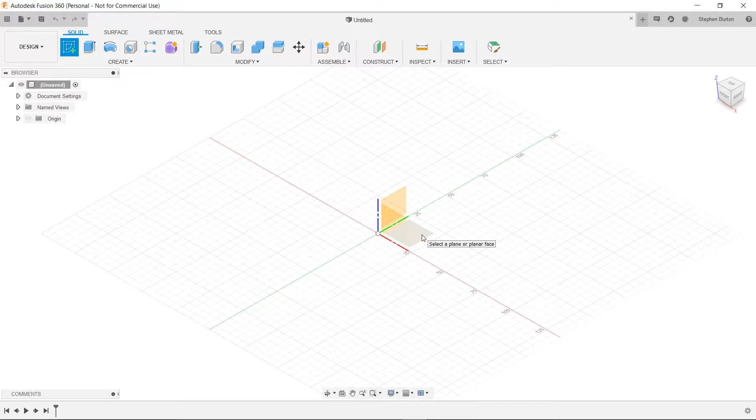So, we're going to start off nice and simple by clicking on Create a Sketch, and we're just going to choose our XY plane here. Now we're going to press R for rectangle, and this is going to give us our 2-point rectangle by default. So if you wanted to change that, you have your selections over here to 3-point and center rectangle. But first, we're just going to use 2-point. So we're going to place our first corner.

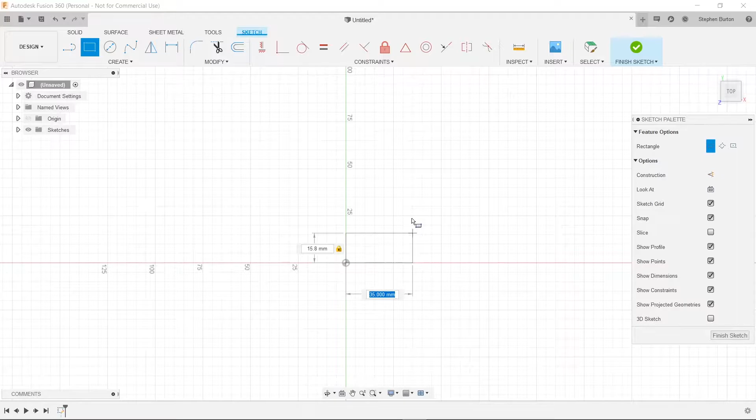And if I didn't mention, I did find the dimensions of a Lego brick online, so I'm actually going to be using those so that we can follow along with that. So, according to this drawing, we have 15.8 millimeters this way. We're going to hit Tab. And then we have 31.9 millimeters that way, and we're going to press Enter.

Now, hearing me say millimeters, if you guys don't have your document set to millimeters by default, then you can go up here to this little drop down arrow, and then we're going to go right over here to change active units. Now, right now I do have millimeters as my default, but if you don't, if you have it in inches or something, then you can select millimeters and then press OK. Well, I'm just going to hit cancel because I didn't change anything.

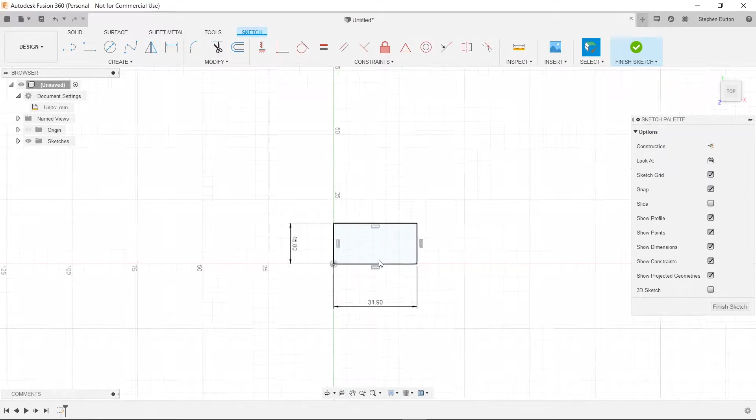So now we need to extrude this. This is like the base, the outline of our Lego. So we are going to extrude it, and according to my dimensions, it needs to be extruded by 9.6 millimeters. So we're going to hit Q, select our face, and then type in 9.6 and press Enter.

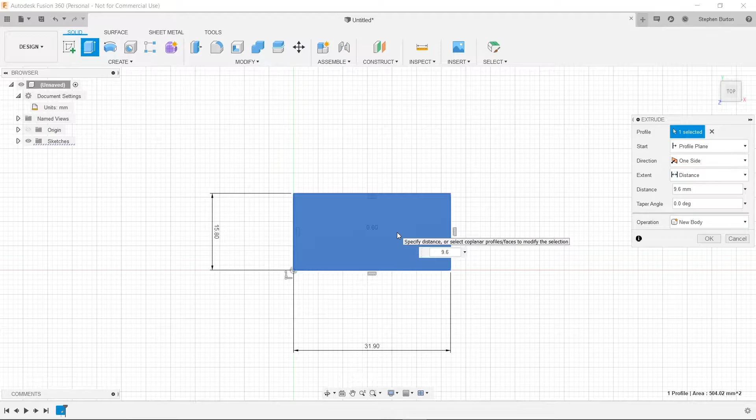So, if we drag down a little bit so that we can see the other side of it, we do now see that there is actual depth to this rectangle. So now it is actually a box, basically. So, we now need to draw in the circles, those little nubs at the top that let the Legos interlock with each other.

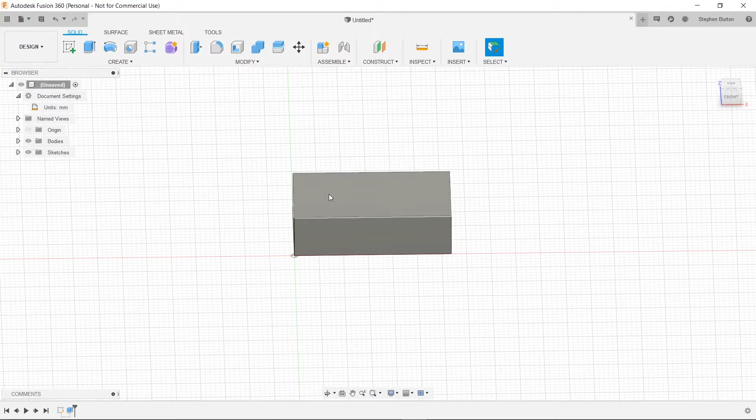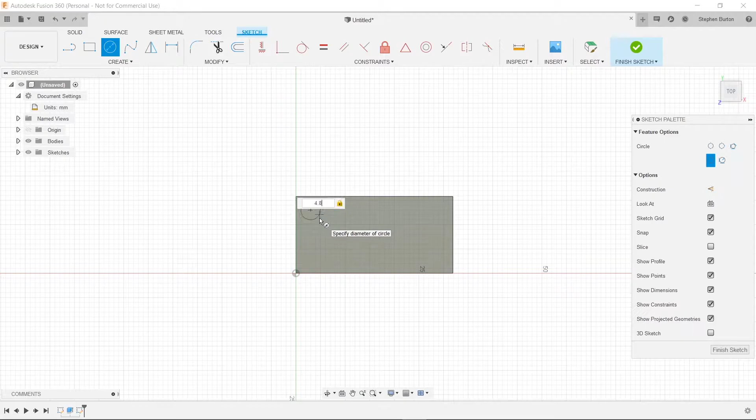So we're going to click on Create a Sketch, and we're going to select that top face here. We're going to go up here to Center Diameter Circle, or we could have pressed C, and we're just going to draw here. It doesn't really matter where at the moment, and the dimension that we need is 4.85 millimeters as our diameter. Now the reason why I said it didn't matter too much is because we're actually going to change that position right now.

So the way we do that is we're going to press D for dimension, and then we're going to select that center right here, and then we're going to select this edge. Now that's going to give us the perpendicular distance from that edge to that center, and we want to make this, once we click, 3.8 millimeters.

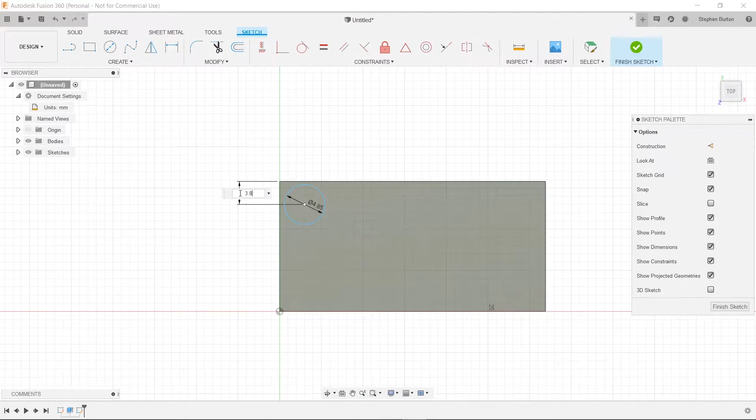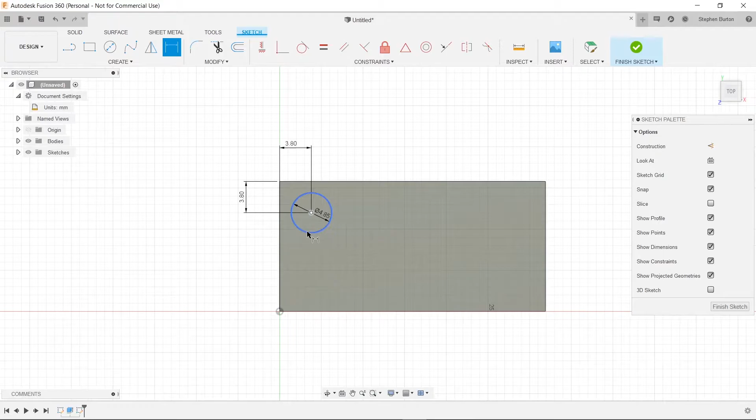And we're going to do the exact same thing again. We're going to click on this center, click on this line, and now we're going to go up here and do the exact same 3.8 millimeters, and we're going to press Enter. Now we want to extrude this before we copy it. So we're going to press Q, and we're just going to click on it. And then the extrusion depth, this is saying that it is 2 millimeters tall. So we're going to type in 2 and press Enter.

Now we could draw every single circle in, however, I think it's easier just to copy it, and there's a nice tool that actually allows us to do that with faces like this. So we're going to go into Create, and then go down to Pattern, and Rectangular Pattern. So first, we need to choose a pattern type of features. It might be faces by default for you, but we're going to select features. Now the reason why we choose this is because we're actually going to select the extrusion.

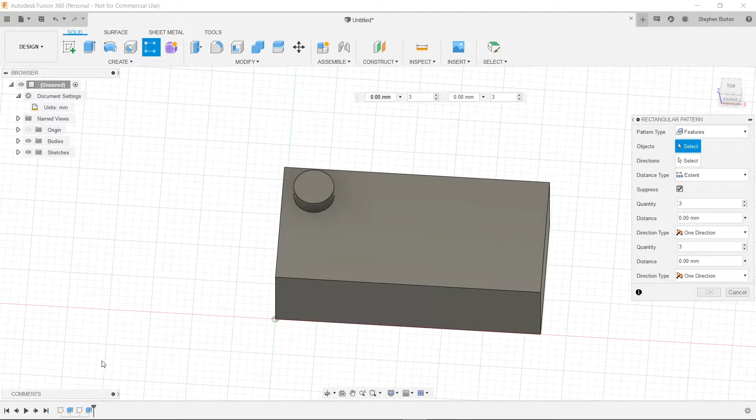And now we have our object selected. We're going to click on Directions, and we're going to choose a path for it. So we can choose either of these sides because they both are on the same path as what we want to draw this out. So we're going to select this as the path, and then we're going to choose 4, because when it says four copies, 4 includes the one that you copied. So if we typed in 1, it wouldn't do anything.

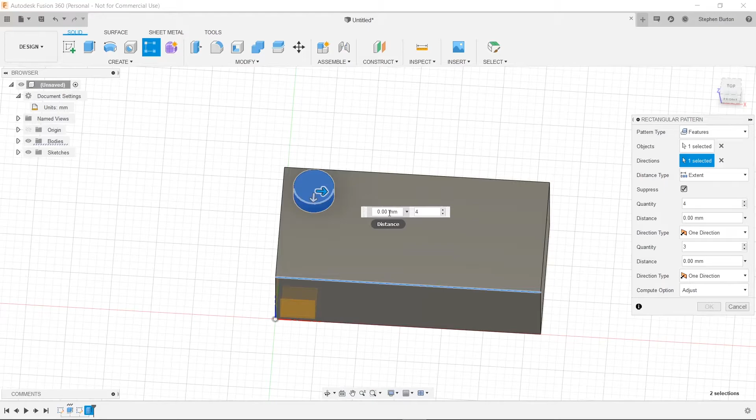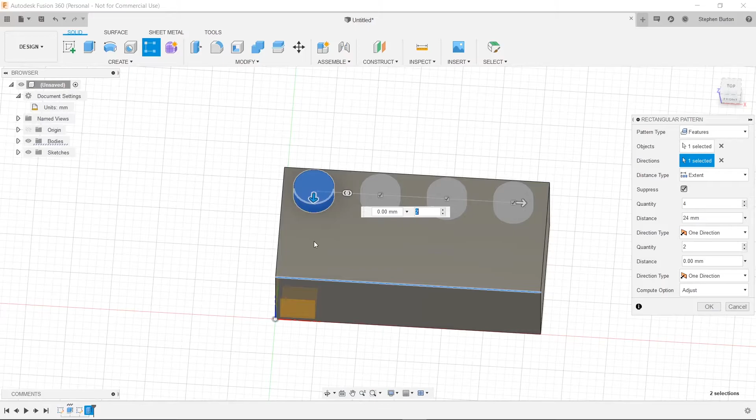So we're going to choose a distance of 24 millimeters, and then we're going to click on this because we're going to also want to copy down here, and we're going to choose a quantity of 2 because now it's going to be copying all 4 of these. So we only want to copy them once down here, and at a distance of 8 millimeters. And then we're going to press enter. Now it's starting to look like a Lego to me.

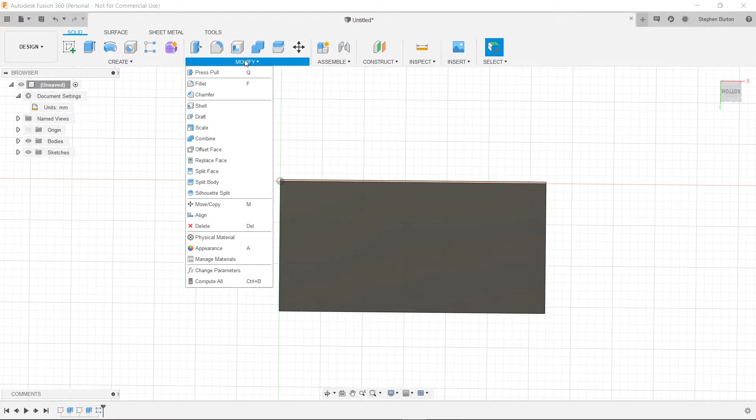So we're going to actually go down all the way to the bottom, and we're going to cut it out. So we're going to go up to here to modify, and then we're going to go to shell. We're going to click on the bottom face, and then it's asking for how much we want to leave. So looking at our dimensions here, our inside thickness is 1.2 millimeters. And then we're going to hit enter.

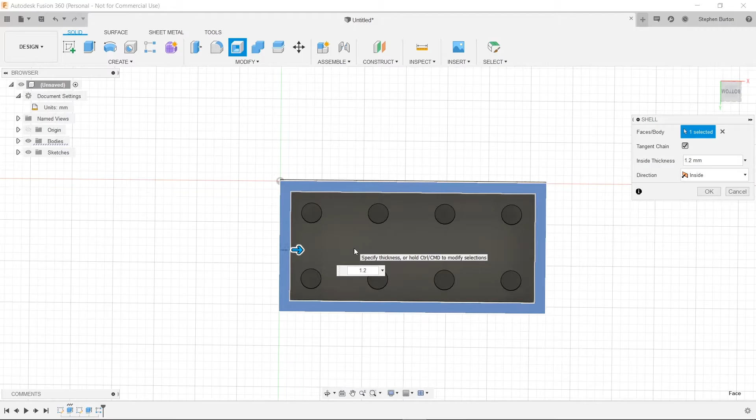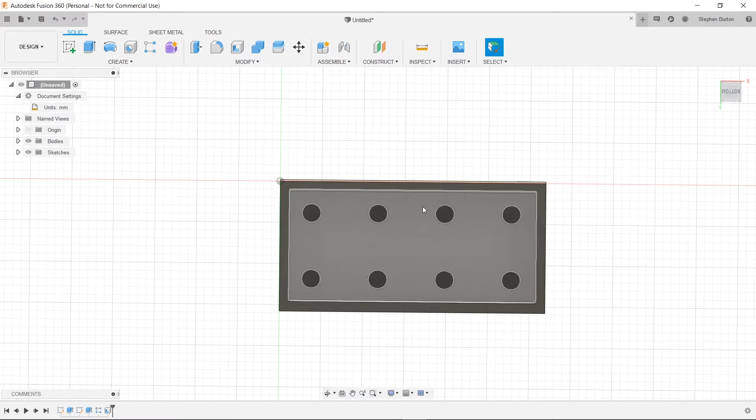Now that we have 1.2 millimeters, we need to create a sketch on this plane here. Because there are 3 circles here, 1, 2, and 3, that are going to be interlocking with the nubs on the top so that you can actually snap these Lego pieces together. So we're going to go up here to create a sketch, and we're going to select this face.

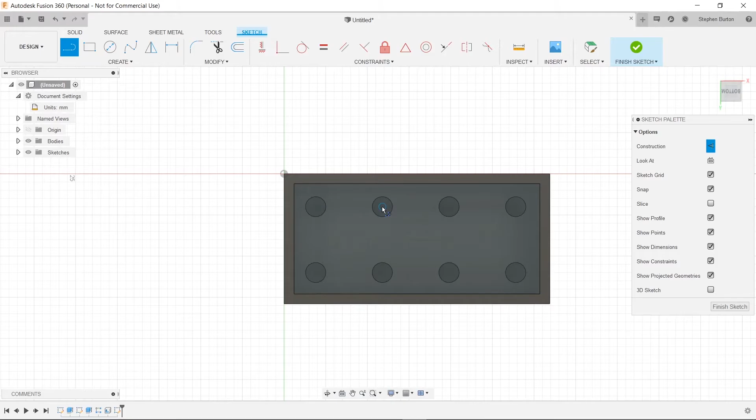Now, before we do anything else, we want to turn on construction lines. Now, construction lines won't actually impact your sketch. All they're going to do is be there for reference so you know where your part is. So we're going to go up to line, and then we're going to select the middle of one of these circles. And now it makes it easy for you because you can select the top or the 4 sides of it. You can select the middle and it snaps to all of them. It's really nice. So we're going to select this middle here, and we're going to do the exact same thing all the way down to this circle right here. Now that we have that, we're going to press escape.

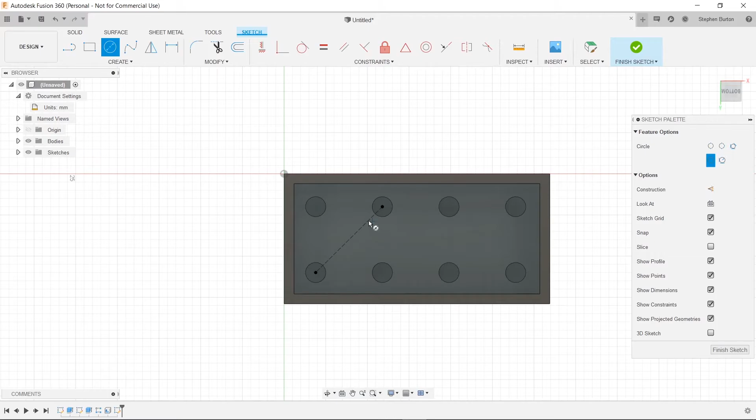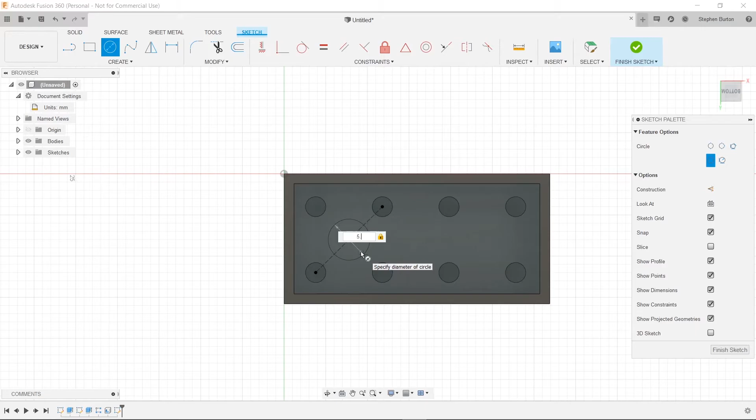We're going to turn off construction line because now we want to draw something we're actually going to extrude. So we're going to go to center diameter circle again, and we're going to find the midpoint of this line, which is conveniently snappable. So we've got that little triangle there that indicates that this is the center. So we're going to click on there, and then we're going to bring this out, and it looks like this diameter is 5.12 millimeters.

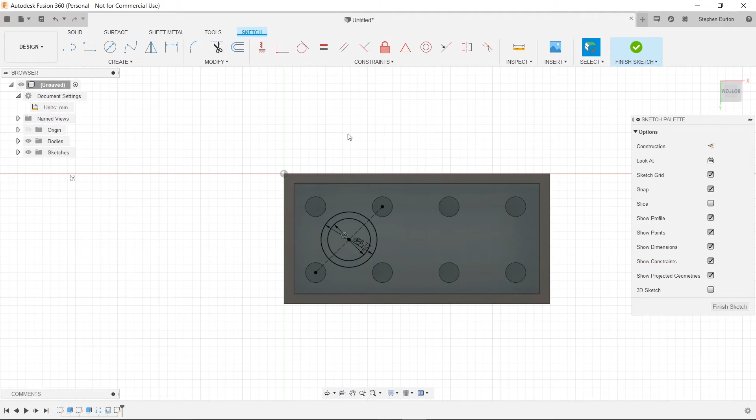So we're going to press enter here, and we're going to do that one more time because we need to draw another circle that's bigger, and that circle will be 6.72 millimeters. Press enter there, and now we've got this nice shape in here that we're going to extrude. So we're going to press E, select that, and according to the drawing, it is 8.4 millimeters deep. So press enter. And if we look, we will just rotate around a little bit. That looks good to me. It looks flush with the bottom.

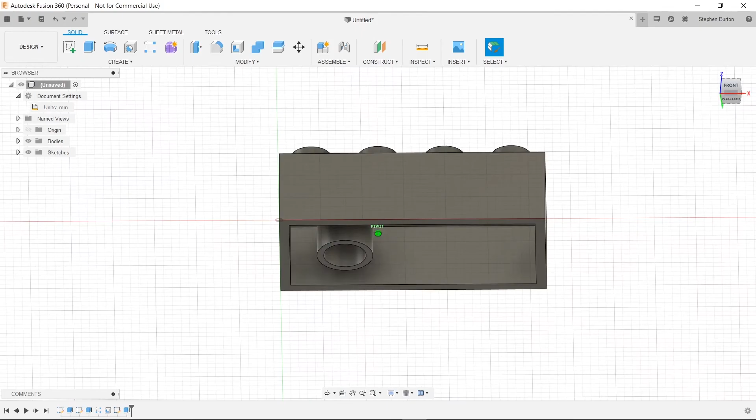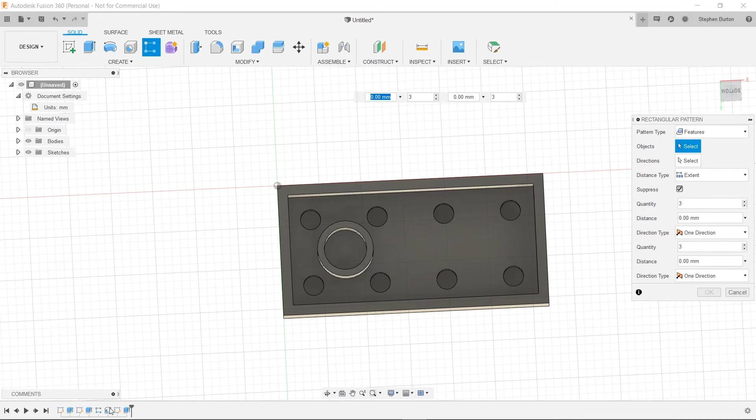So we're going to copy it just like we did before. And to do that, we again go to create and down to pattern and rectangular pattern. We again have to make sure that this is on features, and we're going to select the body that we just drew here as our object by using this little point in our timeline. Now we're going to select a direction, and that is going to be just like before. We'll select one of these edges. So we'll select this one.

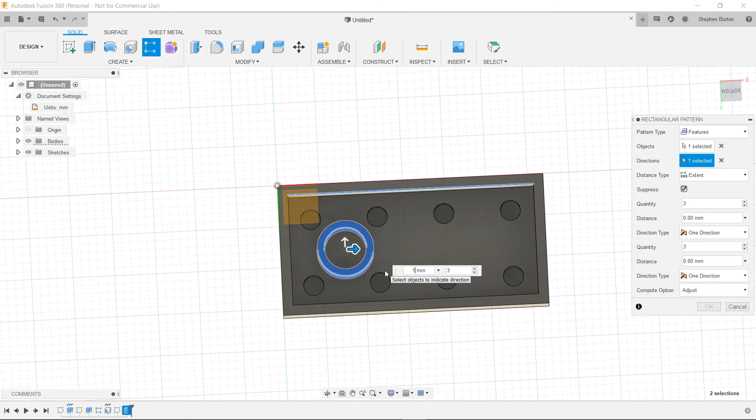And we're going to type in, we only need 3 this time because we need 1, 2, and 3. And the distance is 16 millimeters. Okay, and now we will press OK. And that looks perfect to me. So that's it. That's how we make our Lego, and it is complete. We can print this easily, and they should go right together.